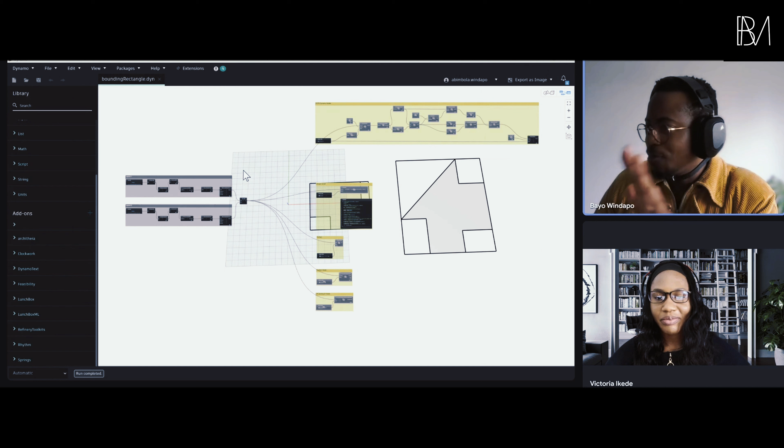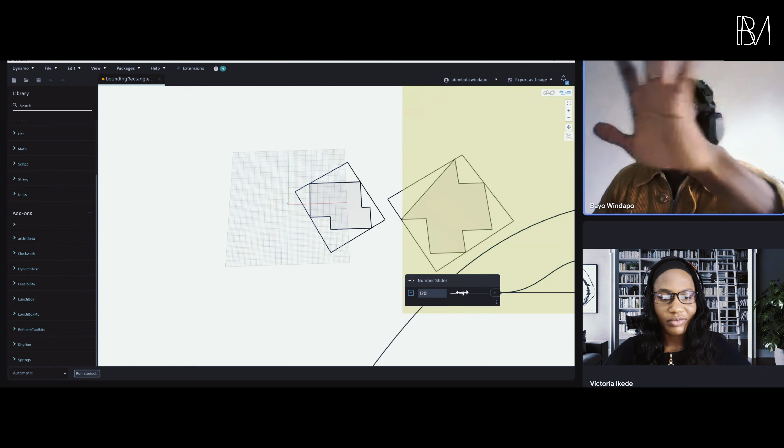What I have on screen here is just a very simple example, because I don't want to bog you down with complex Dynamo scripting. This is something I called a bounding rectangle. It's just a workflow that creates a rectangle around two polygons. So if you have a list of polygons and you wanted to wrap them around a rectangle at any angle, you can use the script to do that. This was very important for the parking workflow I created, since I needed to lay out the pattern at any angle while covering the polygon.

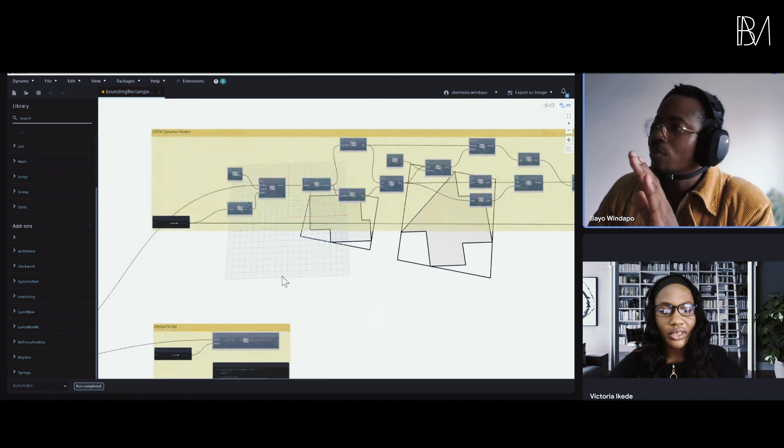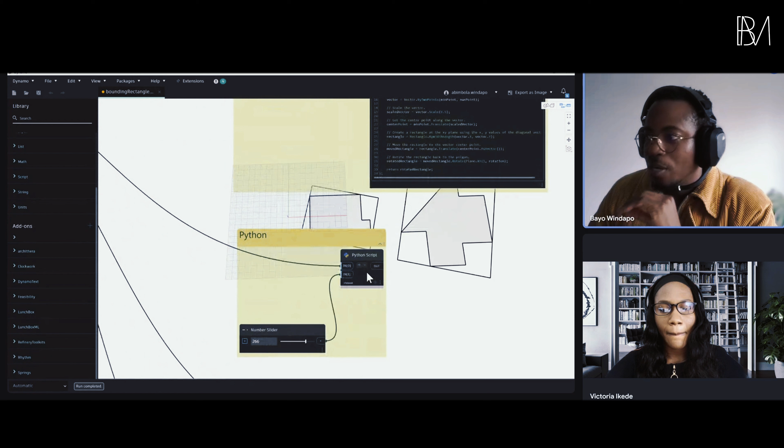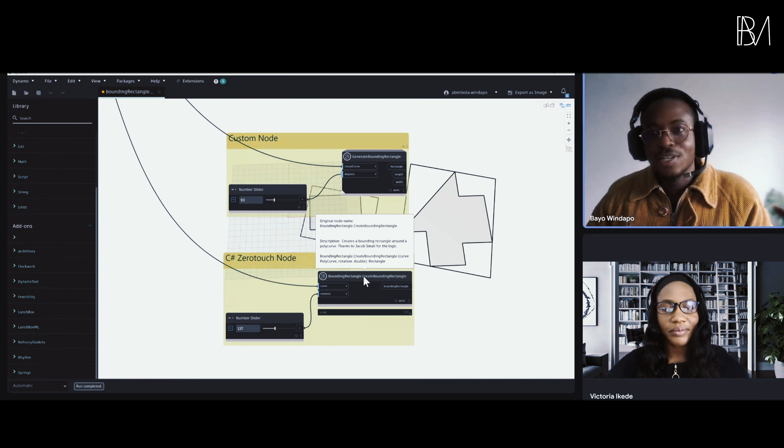In this script, I have this bounding rectangle workflow coded in Dynamo nodes, then coded in design script syntax, which is a scripting language that's part of Dynamo. Then I've done it in Python, and I've made it a custom node which you can install. I've also done it in C sharp. So I'm basically trying to show you five different ways of doing things in Dynamo, so you can decide for yourself if it's scalable or not.

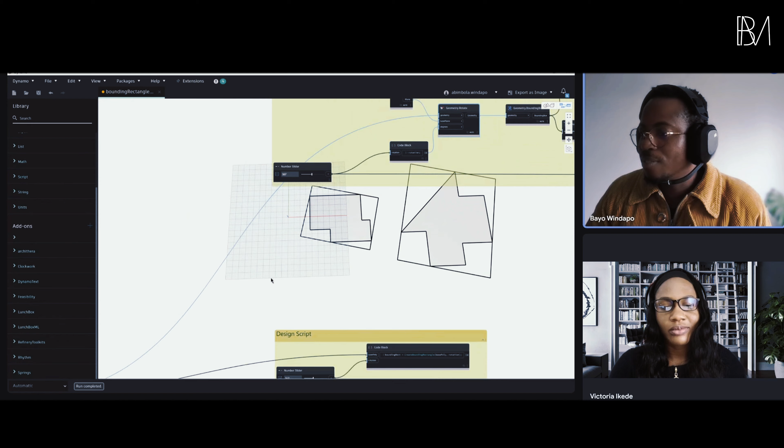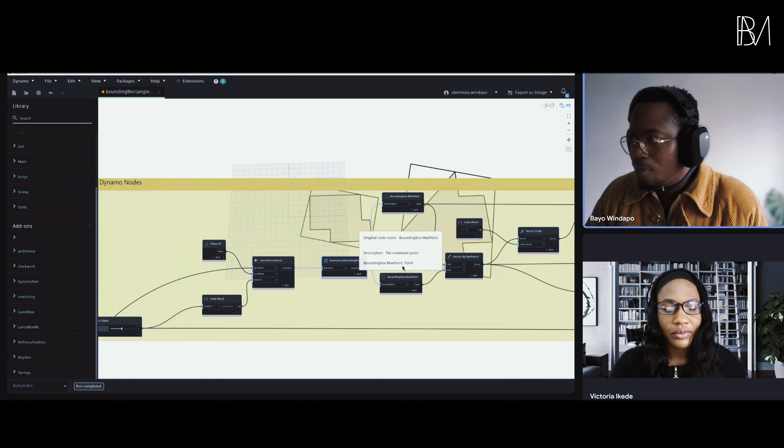Okay, I'm not going to go too deep into the programming, but basically what we have here is the geometry — we've got these two geometries, highlighted in blue. So what I've done to create the bounding rectangle is we first rotate it, get a bounding box around it, get the min and max point of the bounding box, and then create a vector using the min and max point. We scale the vector.

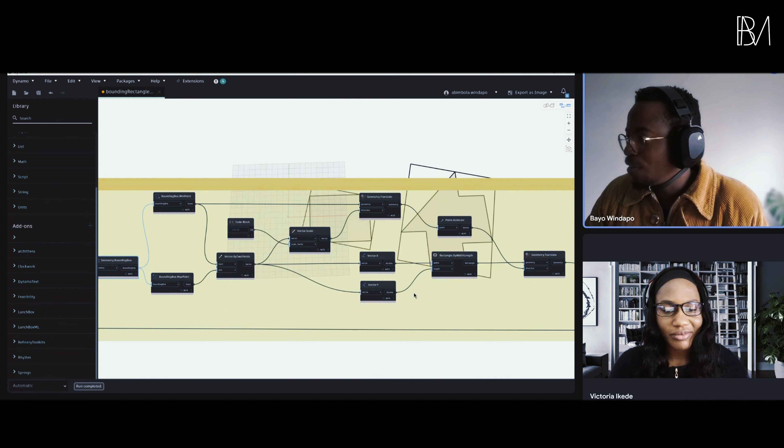I'm going very fast through this, because this isn't about time, this isn't a video to learn Dynamo. We get the vector's x value and y value, and use that to create a rectangle. We also translate the min point using the scaled vector, and then translate that rectangle, which means move it, and that creates the bounding rectangle.

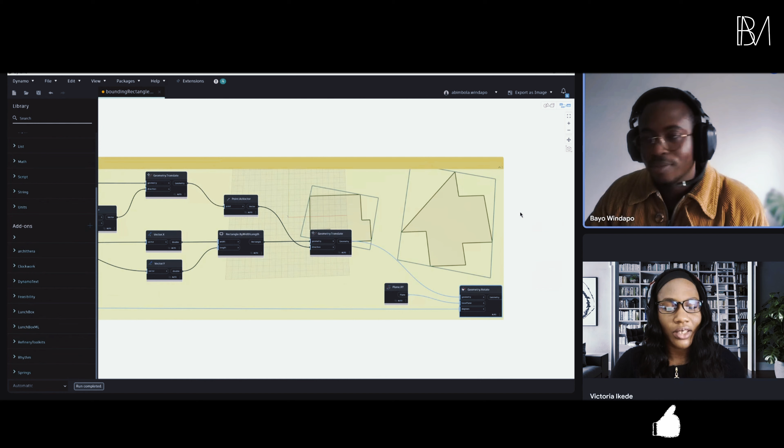As you can see here, this is a lot longer because you've got a lot of nodes. If you're trying to build a complex script, like the one for creating parking layouts, the node count will be almost 1,000 nodes. At that point, Dynamo gets quite slow, to be honest — it can't handle a lot of nodes on the screen.

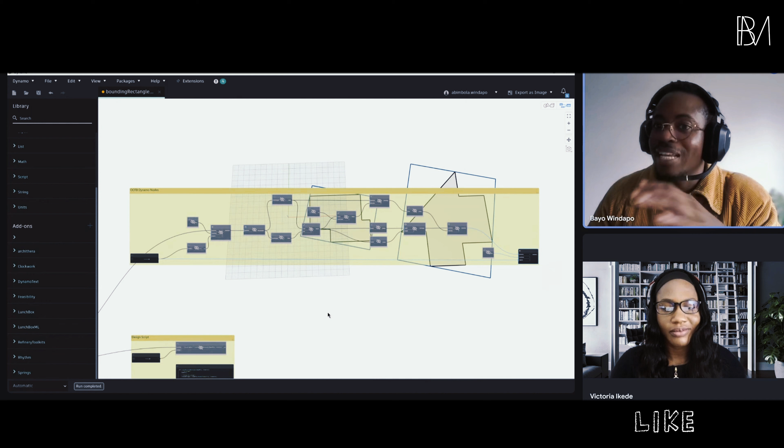When I got to that point, I was very frustrated because I couldn't zoom in anymore, and you don't want to do that. So the other thing you can do is use design script.

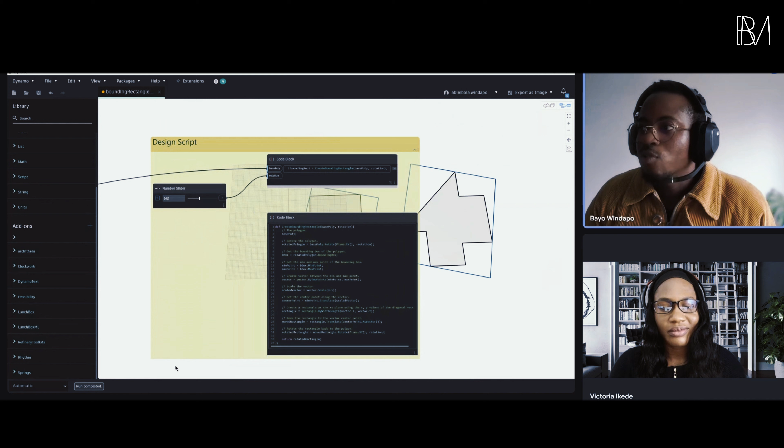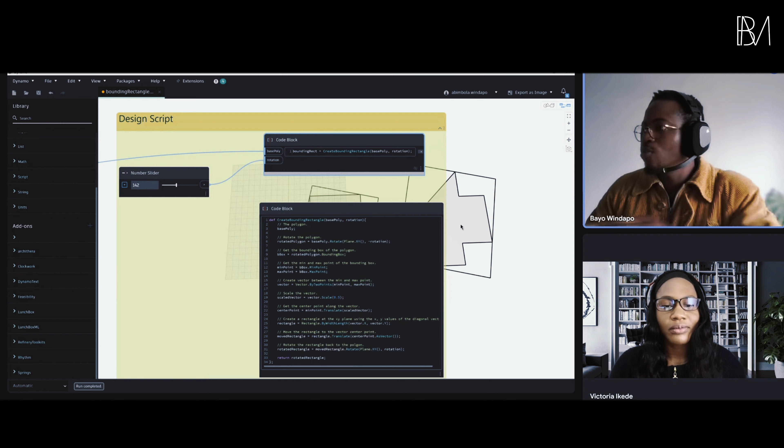This is the exact same thing I'm doing right on top here that I'm doing in here. But what I've done here is make this into a function. So you've written a function in design script, and then you can call that function as a node, so you don't have to use these wires to connect a node.

I'll just write it here. I can call that function - I can say create bounding rectangle, and as you can see, it is calling that function. Then I can type the other parameters in there and it will create that same thing.

In summary, this code block with just two nodes is doing the same function as the other Dynamo group that has maybe up to 12 nodes. In terms of runtime, did you notice one was faster, or about the same?

For this kind of small thing, it's about the same. But I have heard that design script is a lot faster - okay, maybe not a lot faster, but it is faster. John Pierson has done a test between using C sharp and using regular Dynamo nodes, if I remember correctly, and C sharp is always faster.

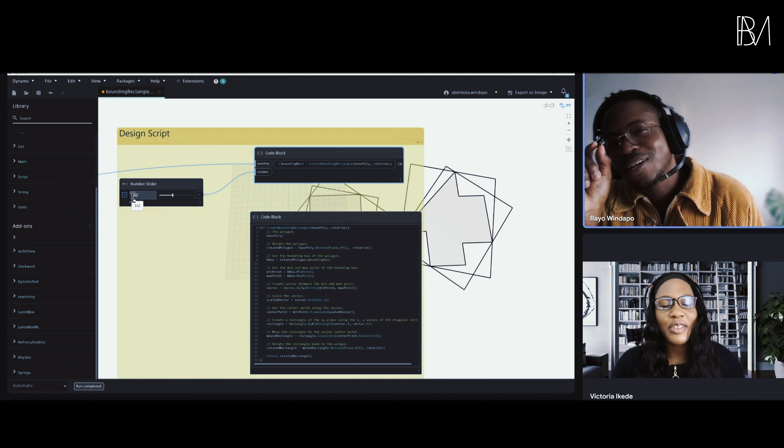Okay, guys, you heard it here first. It's usually a very small fraction, but it is faster. But when you start doing a very big graph, I think it starts to really be a lot different, right?

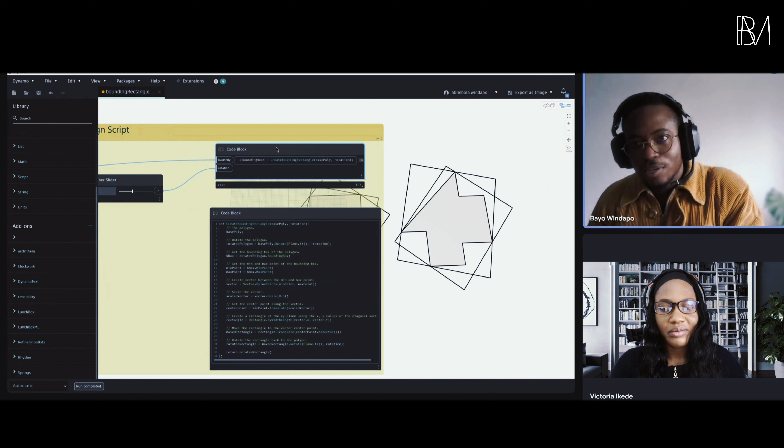Yeah, so you can imagine having a very large graph where you build a lot of functions and you're not connecting all these wires together. You're just calling those functions in these code blocks, right? It makes it easier to manage a Dynamo graph because now you don't have too many wires all over the place - the spaghetti that people don't like.

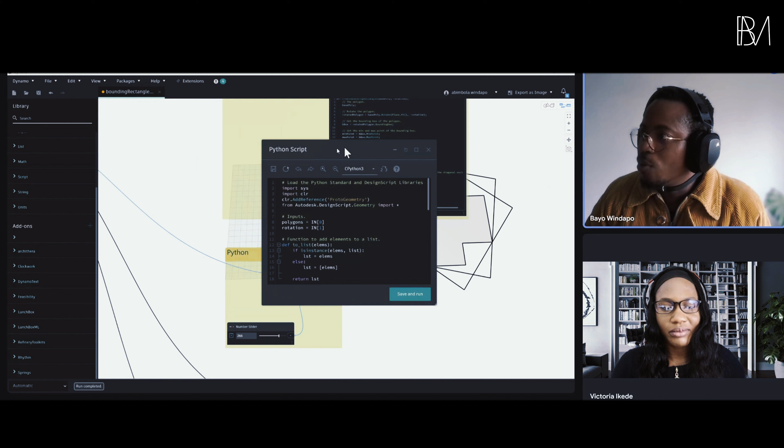And then you can also do it in Python. So all that, the same thing in the previous graph I showed you up there, is written in just one node - the same thing in that one node, and it's a lot easier to manage as well, a Python script.

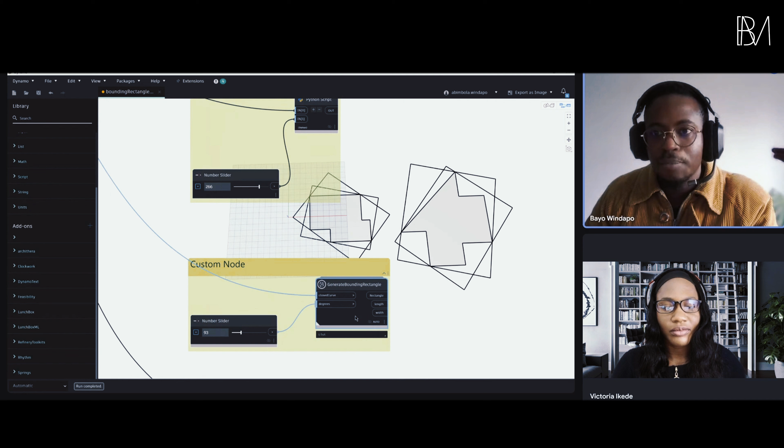You can do that in Dynamo as well. And then what you can also do, to allow many other users in your company or even other people in the Dynamo community to have access to this script, is to make it a custom node, which you can publish in the Dynamo package manager. So basically, if I double click in here, this is one I've written a long time ago.

You can see that, but this is a different version - it has all those Dynamo nodes within it, but that has now been packaged as just one custom node, and it does the exact same thing. If I just preview this again, it does the exact same thing like the others.

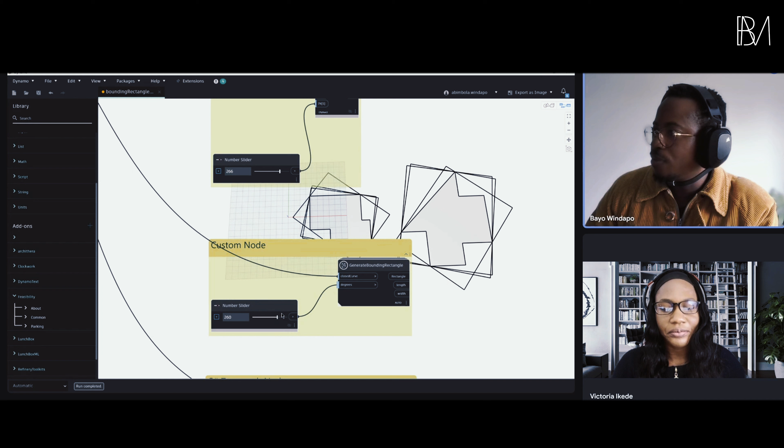Okay, so I've tried to show you - a new Dynamo user will typically start from the nodes, but as you get more experience, you should be getting into building custom nodes and you should be using design script. I started using design script from the start - I don't know how I got into it, but it just sort of worked out that way.

So I think the next node would be C sharp. But before we look at what that is, I know that for someone who's only been using Dynamo out of the box, the first question they're having is, which one should I learn first? Which one is easier to learn? That's the question I always get. I've learned that when it comes to programming, it doesn't really matter as long as you get started. But from your own experience, was there any one that helped ease you into the process before you started trying other things?

Okay, so I started off using the nodes, yeah, for sure.

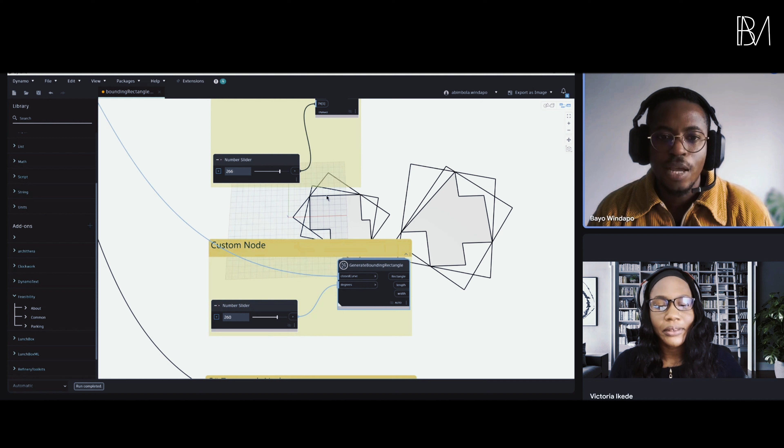Yeah, but when I got into the community, I saw people using this very funny script thing. I was like, what is this thing people are using? And then I got into DesignScript. But really, with programming, the thinking is all the same.

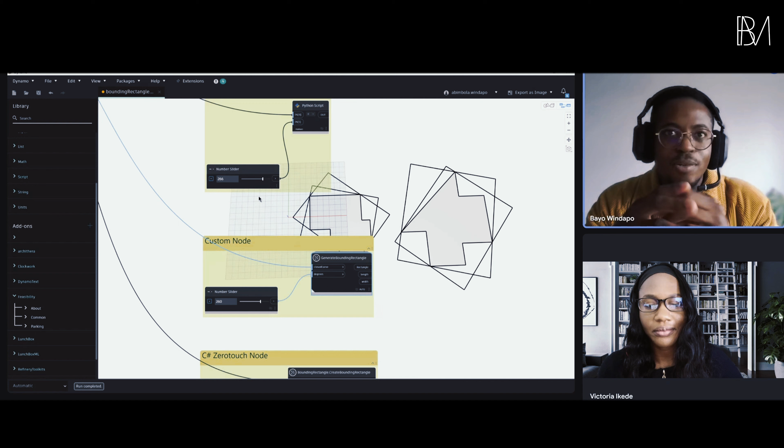Yes, I think the first thing you need to get used to is thinking computationally, thinking about how to break problems into very small problems, and then solving those and learning how to put all your little solutions together. So I did this course, just for those who might want to get into this: zero touch nodes. John Pierson has a course on Design Tech Unraveled. I think that's what it's called.

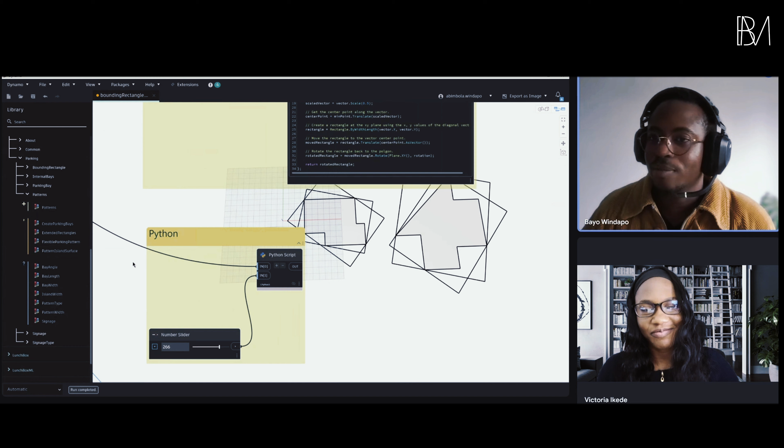And he shows you how to build a zero touch node from scratch. Awesome. Very clear. I mean, I was running with it in about a week. I was already used to it. Yeah, okay, so worth checking out.

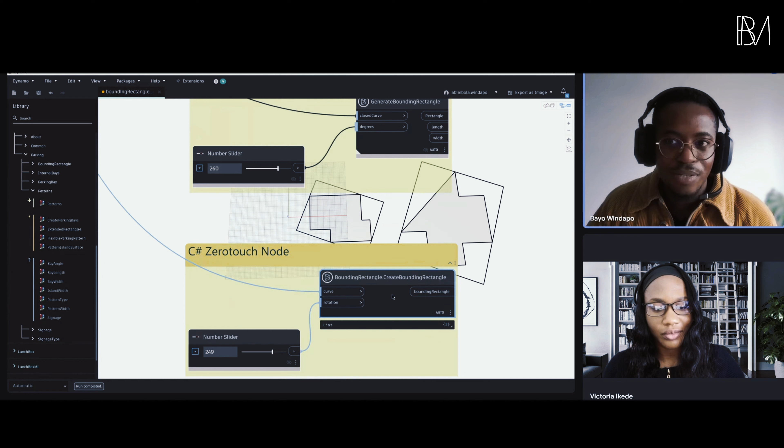Okay, so lastly, we have the zero touch node over here, which also creates the bounding rectangle. If I show the preview over there, it does the exact same thing. Okay, but with this, if I double clicked on it, you can't get into it, right? It's not like a custom node that would allow anyone to see what your code looks like.

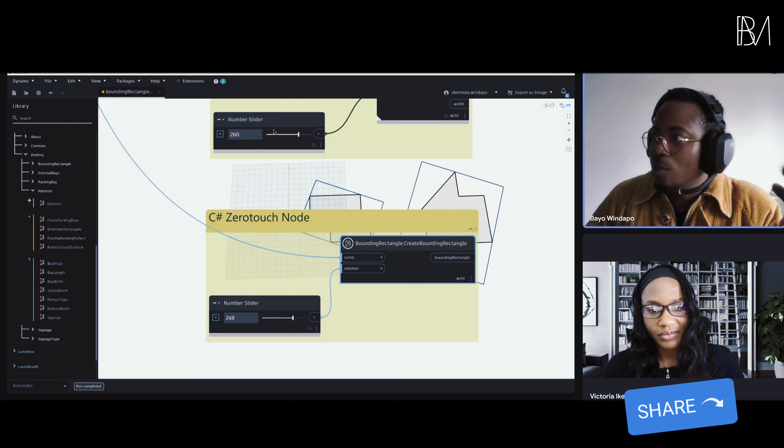So if you're a little precious about your work and you don't want anyone to get into it, a good idea is to get into C Sharp to build these zero touch nodes. It works exactly like the out of the box nodes, because if you use an out of the box node, for instance, this one, which is a number slider, you can't click on it and open it up, because they're also built in the same way, right? Right. So let's take a look at the C Sharp code.

All right. So over here, this is my project. I'm busy working on a package called Feasibility. It's a package that's mostly for designers. It's targeted toward urban design. So if you wanted to start to lay out parking, lay out plots, or you want to be able to program multifamily housing, apartment units, this is targeted towards that.

So if you think about test fits, basically, I'm making a test fit for Dynamo. So people can do all that stuff within Dynamo without having to go outside and pay tons of money. So I've started off making the parking nodes first, then later on I'll go into the other aspects.

So over here, if you look at my project here, I've got the bounding rectangle over there. And then I have what's called a method, I think that's what it's called in C Sharp. So I've got the method here that's called create bounding rectangle, and it's got two inputs, which is the polycurve, like you saw in Dynamo, and the rotation value, right? If you go back in the video, you can compare, it's doing the exact same thing as I did in the DesignScript, right?

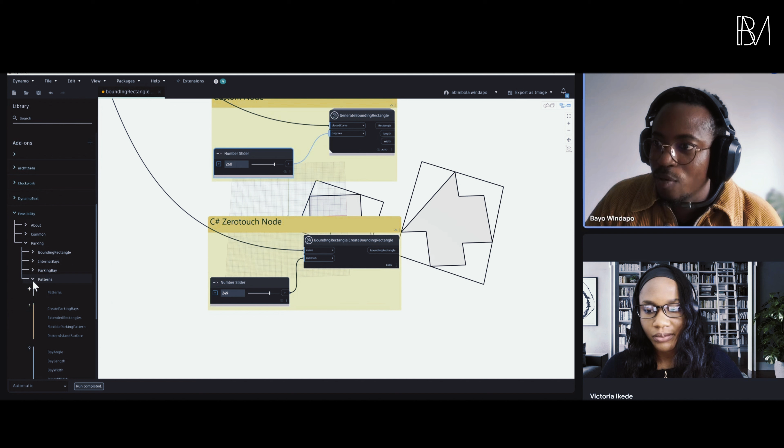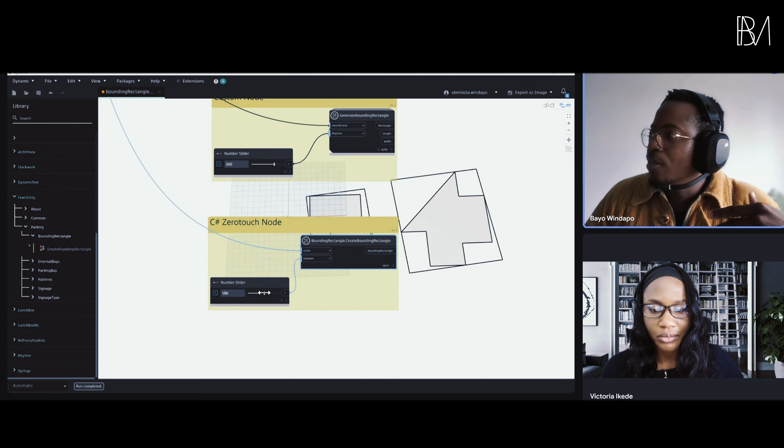Then I've got all these other nodes. I don't know how many nodes now, but it's a lot of stuff there. And it works the same. But the thing with this is it's faster, as John Pierson showed in his video, and you can also publish this on the package manager, which would allow other people in the community to download it, and also people in your office. Using Dynamo nodes like that, you don't have access to that kind of scalability, right?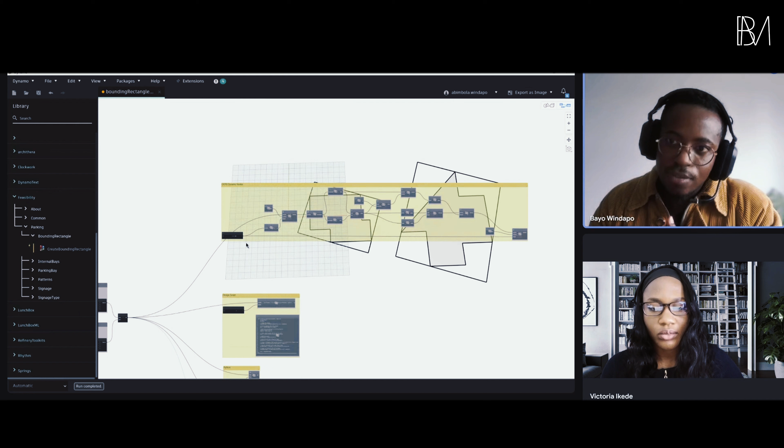Right. My first takeaway from this is that you can load your DLL files into Dynamo in a similar way to how you would load them into Revit.

Have you ever had any compatibility issues where maybe a certain version of Dynamo can't read a script you had, or is it forward and backward compatible regardless? Oh, so yeah, there would be that issue because of different versions of Dynamo. I mean, it works the same way with Revit. There's the .NET compatibility.

So I'm not sure exactly, I think Dynamo version 3 or something is, I can't remember what the latest .NET is. Four point eight, but yeah, that would be an issue. So that would create issues as well, as I imagine it would in a Revit plugin. Okay.

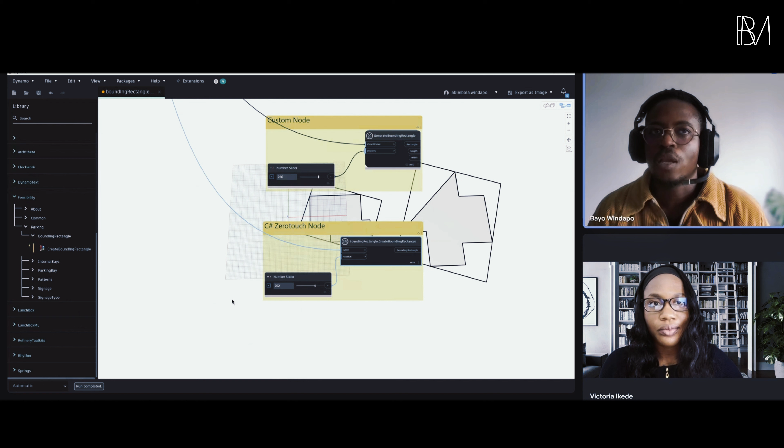So, have you tried this approach for something generative design related or complex geometry related? Because one of the comments people raised with C Sharp is that they find it more comfortable to work with geometry in Dynamo and they don't see how they could replicate that process in C Sharp. For sure. So for instance, the parking thing which I've created, I can show you the parking application. Let me just bring it up on my browser.

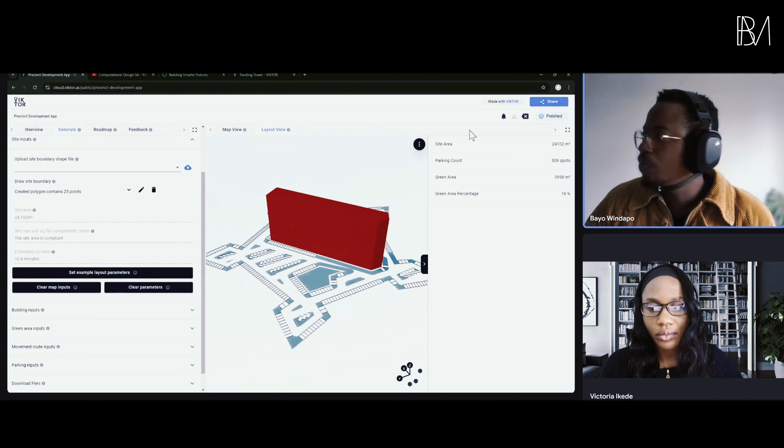Okay, there we go. So this is built off Dynamo. So this is VIKTOR. I'm a supporter of this platform because why I was happy about using this platform is that I thought I would only be able to build an app like this in about 5 years. That's what I thought, maybe 5 years after I finish, because I'm busy doing a course

for cloud development. I'm gradually doing these courses, and I said, okay, after this course, probably I'll have the skill in about 5 years to do something like this. But VIKTOR already comes pre-packaged with things that allow you to have 3D views, PDFs, images, graphs. So with some simple Python programming, you can pull in your Dynamo scripts that you've built and package them into one app, right?

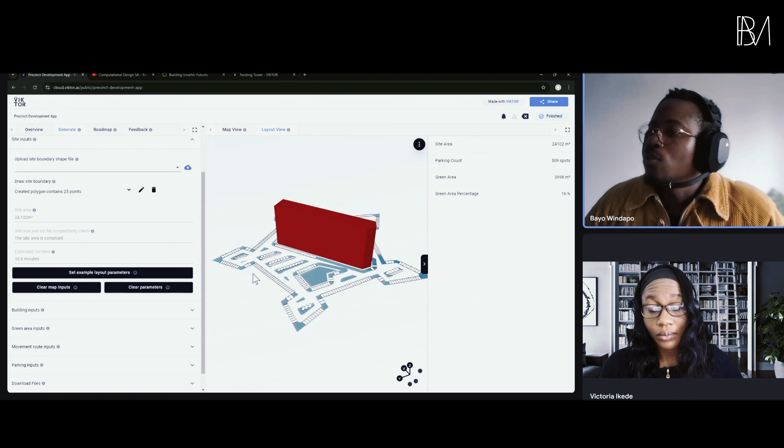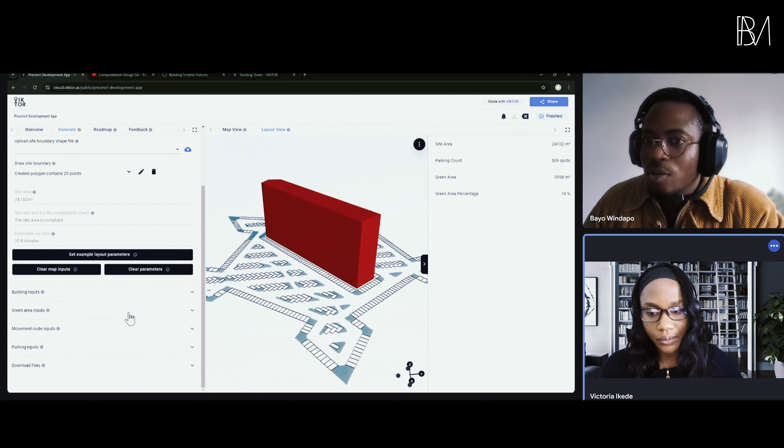So this is the app I built. It basically works off that parking algorithm I built. On a map, a user can come in and draw an outline like this, and then they run it, and it creates something like that for them. And it has a lot of inputs which are fed into Dynamo, like the parking width, parking spot length, parking rotation, and so on. Then it creates this layout for you, telling you how many parking spots you have, the area of green spaces, and so on.

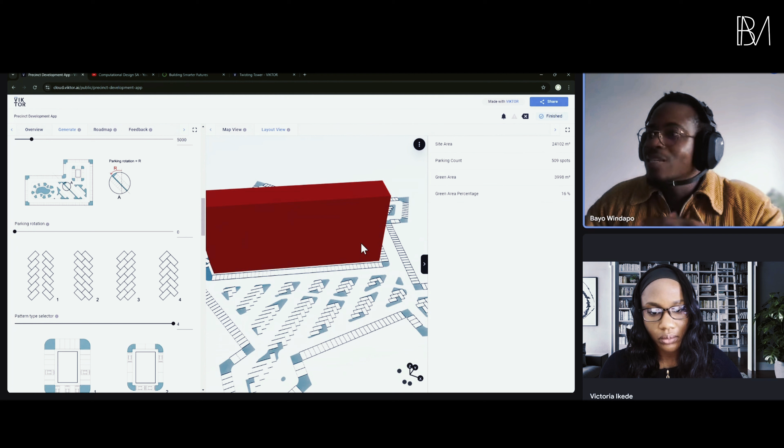You can make this as complex as you want. The sky's the limit. It depends on how creative you are and how far you're willing to go into it. This is amazing. I think this is also a good moment to remember that Revit is not BIM. So in all your solutioning, it's good to look at solutions outside the Autodesk space if you can. I imagine this solution will be very helpful for people who don't really use Revit day to day, but need to design their parking.

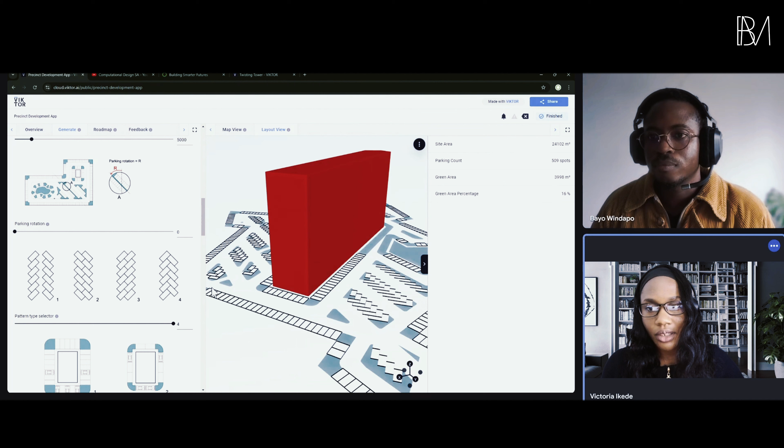In terms of this, could you tell us a little about VIKTOR and how someone could get started with using VIKTOR? Okay, so to get started, if you are a Dynamo user with Python skills, I would certainly recommend taking a look at the channel I started with a few colleagues.

Oh, what happened? My screen went off a little bit. Is it showing? Yes. Okay.

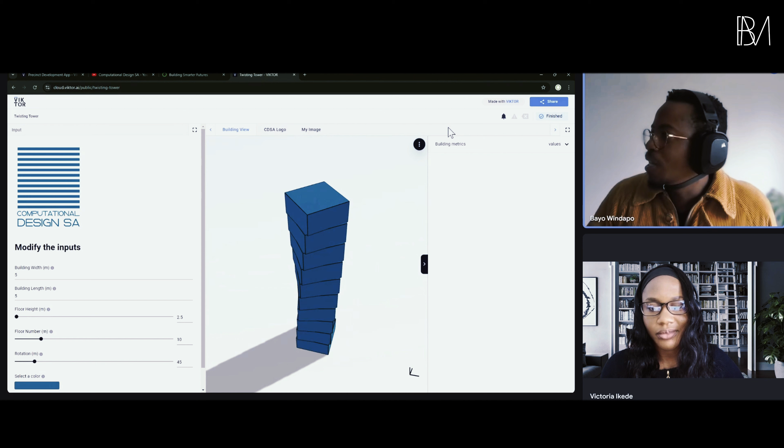This very simple twisting tower. You will basically build this along with me, and then you will know how to publish an app on VIKTOR. Very simple. It also shows you how to create the outputs over there, and how to add images, and I put a funny GIF image there as well. I mean, what better way to use software than to make ourselves happy?

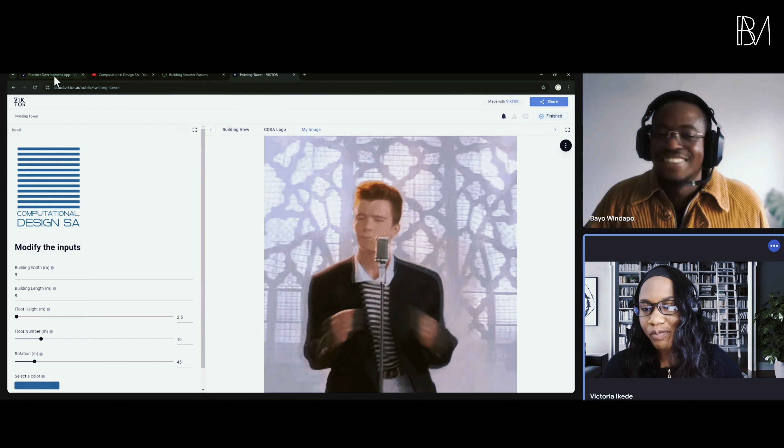So, just for clarity, who owns VIKTOR? Is it open source? Is it owned by a company?

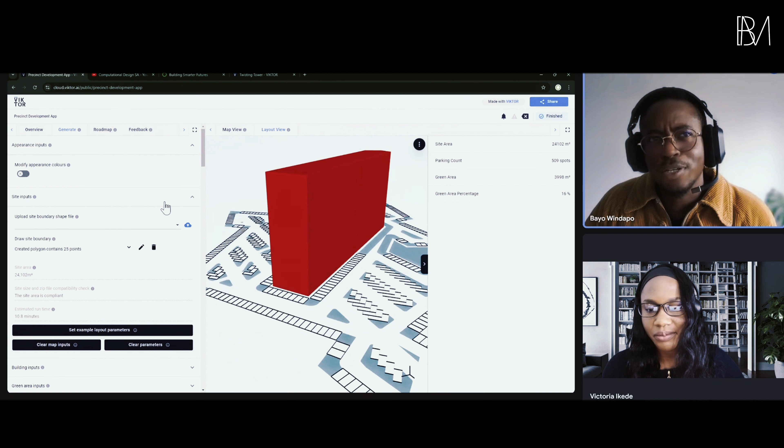Okay, it's owned by a company. It's not open source. But it's owned by, I mean, it's VIKTOR. Yeah, it's owned by VIKTOR. Yes, they are a company based in Amsterdam. No, not Amsterdam, Rotterdam, sorry. Rotterdam, the Dutch company. Yeah, but they're very helpful. You ask a question, they're always happy to help.

And this, by the way, is a free public app. So you can build 5 free public apps, but it just has to be public. If you want to start charging people for it, then you'll have to get a license from VIKTOR.

Well, this has been very enlightening. I think I'm personally also going to give this a try. Fun fact, we also created a computational design group in Nigeria, but I think we didn't go as far as having public channels. It sort of just started and stopped at a WhatsApp group. Might be worth reviving. I think there's a lot of interesting people on there as well who have been doing a lot of things, even though most of us are now in the diaspora, but it was a very interesting platform just to share ideas. So it's great to see that there was one in SA as well.

So just to round up, we started this video sort of resulting from me saying you can't scale Dynamo in your organization. We've established that C Sharp is faster, even though it's by a fraction of a second, but depending on how complex your scripting goes, it's probably best to try Python or DesignScript or C Sharp. Revit is built on C Sharp, so it's always possibly going to be the fastest because you're interacting with the API in a more direct way instead of going through IronPython.

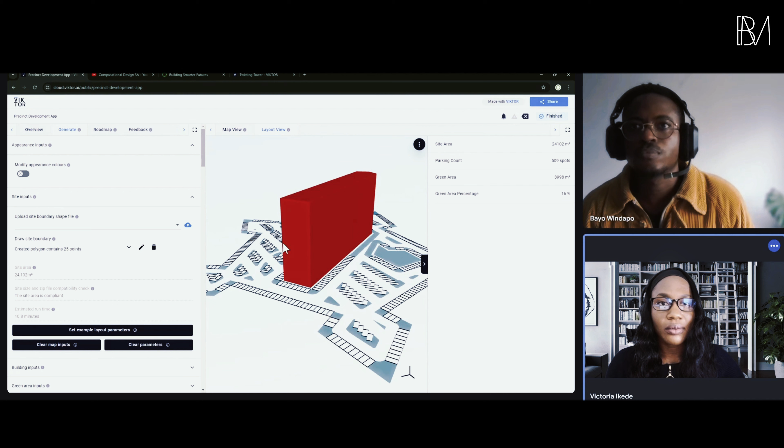Yeah, so I started with the Dynamo scripting and with the nodes, which I showed you, right? Just with the Dynamo out of the box nodes. And I started wrapping them into, what do we call this thing in Revit? Dynamo Player. Yeah, Dynamo Player. I started trying to get people to use that. People don't use that. Somehow it doesn't work.

It doesn't scale. I think people just don't like to go to a random button at the far right end of their screen. The hidden tab that no one ever opens. Yes, I agree. And then it takes so long to open, and people just lose interest at that point while it's loading.

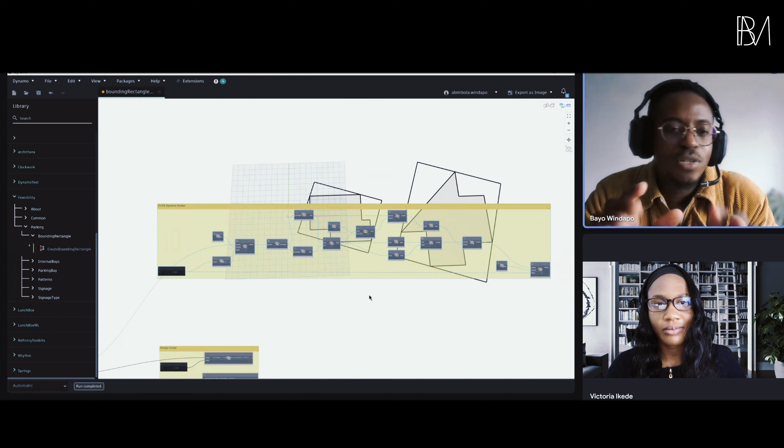So there was more traction when we used PyRevit to publish the nodes as a Revit ribbon. So we had a special tab. Then everyone knew that was the company's scripts. So the advantage of that is that it wasn't just about Dynamo. I could also link to folders that were on the server that would typically be very difficult to find.

Let's say folders that contained details, folders that contained some company standards or something. That could also be added in the ribbon. And then we also have the Dynamo scripts. So our scripting was more focused on documentation, which is what I think a lot of Revit plugins do. If you wanted to start creating sheets, maybe you wanted to make something that automatically takes all your rooms and throws them on sheets and dimensions them.

But once you start getting into very complex geometry and you want to do early stage analysis, you just have to get back into Dynamo and or Grasshopper.